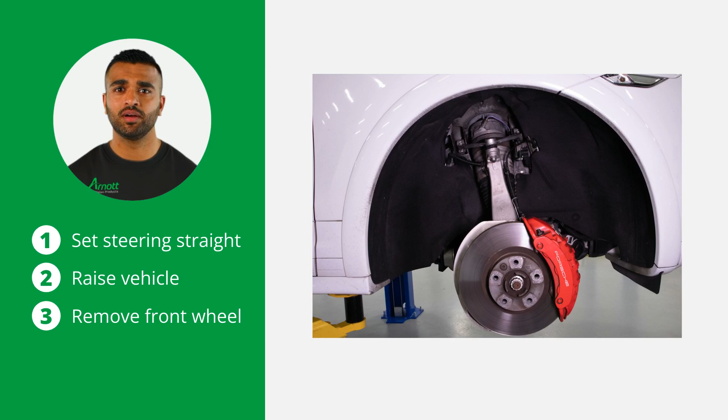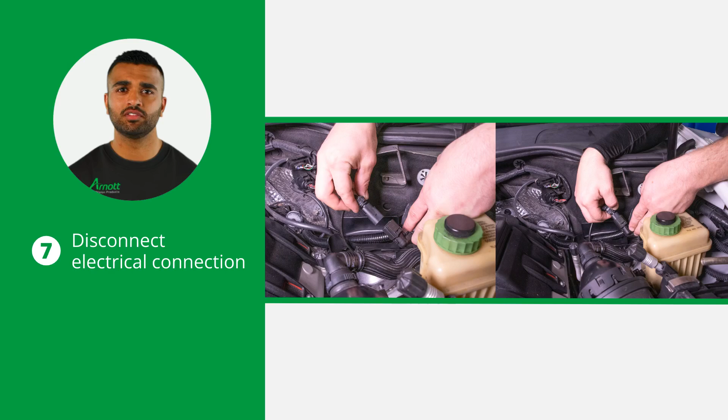Start by setting the steering to straight ahead. Now raise the vehicle and remove the applicable front wheel. Open the hood and remove the applicable engine bay trim to access the strut's top mount and electrical connector. Next, remove the engine strut damper. Now it's time to remove the electrical connection to the strut. When the electrical connection is disconnected, loosen and remove the strut's top mounting nuts.

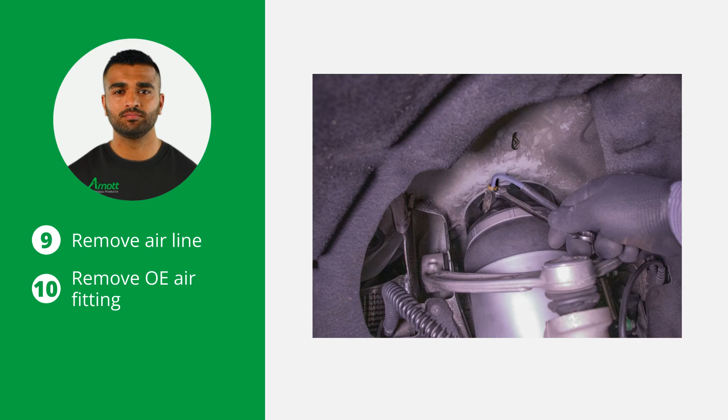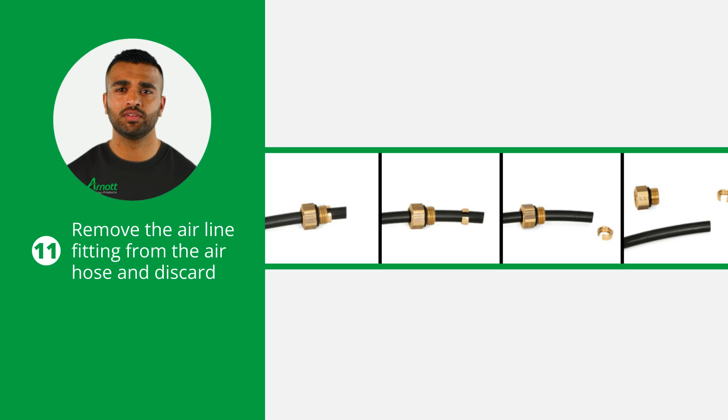The next step is to loosen and remove the airline and then remove and discard the OE air fitting. Prior to inserting the existing airline into the new air strut, remove the old airline fitting from the air hose and discard it. To do this, slide the threaded portion up the line and spread the collet open to remove. Then slide the air fitting off of the airline and discard.

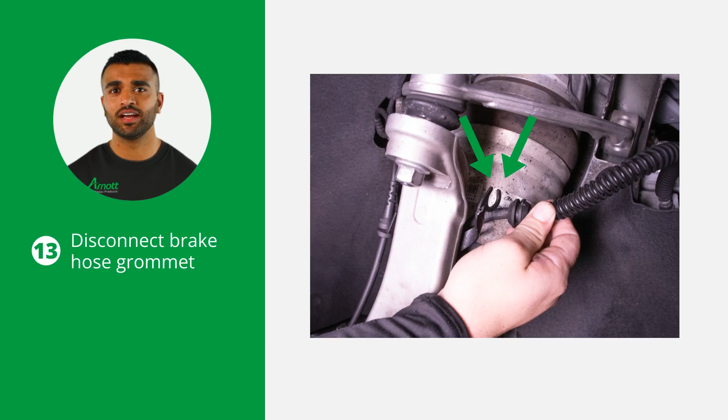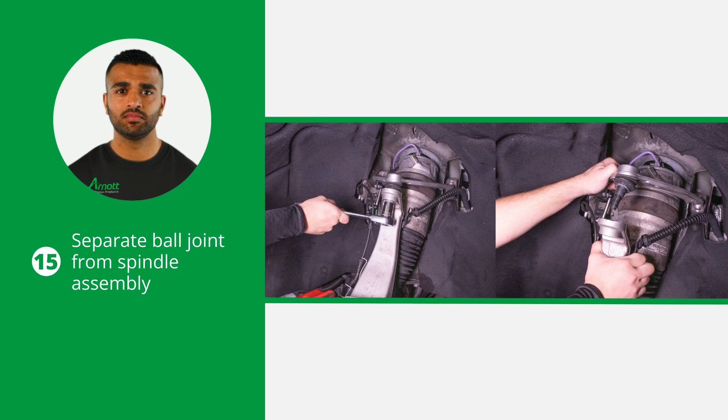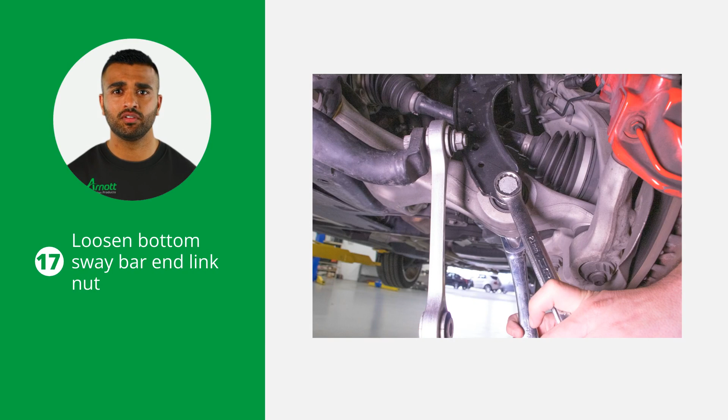Continue by disconnecting the height sensor linkage. Disconnect the brake hose grommet. Now disconnect the ABS sensor grommet and connection. Next, separate the ball joint from the spindle assembly. Loosen and remove the top sway bar end link bolt and nut. Also loosen the bottom sway bar end link nut, but make sure you do not remove it. Finally, loosen and remove the lower strut bolt. You can now remove the strut from the vehicle.

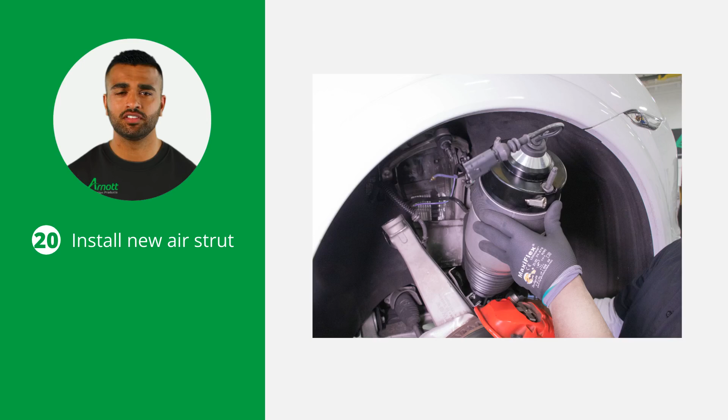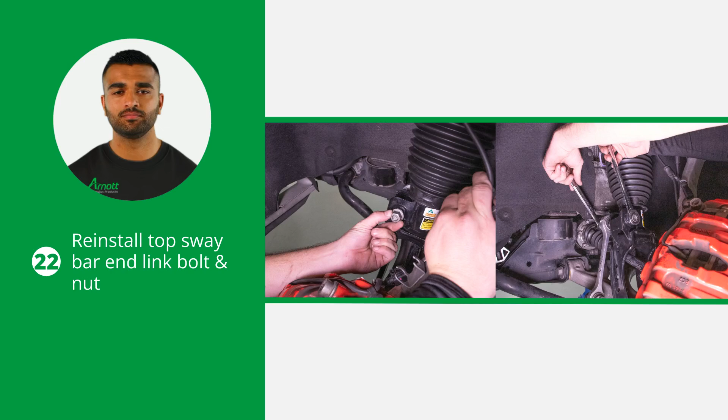Start installing the new Arnott air strut into the vehicle. Ensure you tighten all nuts and bolts to the vehicle manufacturer's specification. Reinstall the lower strut mounting bolt. Reinstall the top sway bar end link bolt and nut. Now tighten the bottom sway bar end link nut. Reinstall the upper ball joint nut.

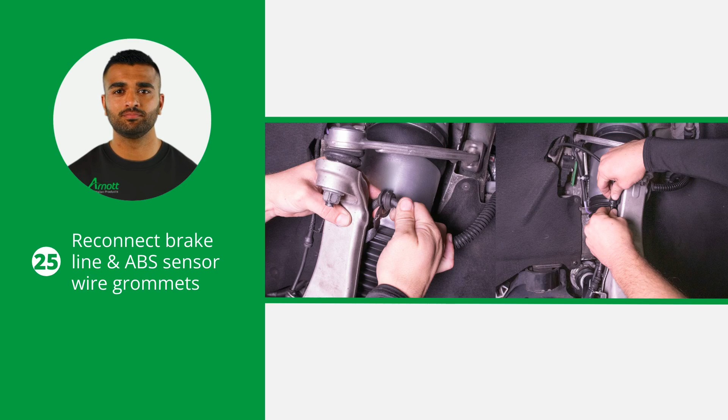Now start reconnecting the sensors. Begin with the brake line and ABS sensor wire grommets. Next, reconnect the ABS sensor wire. Finally, reconnect the height sensor linkage.

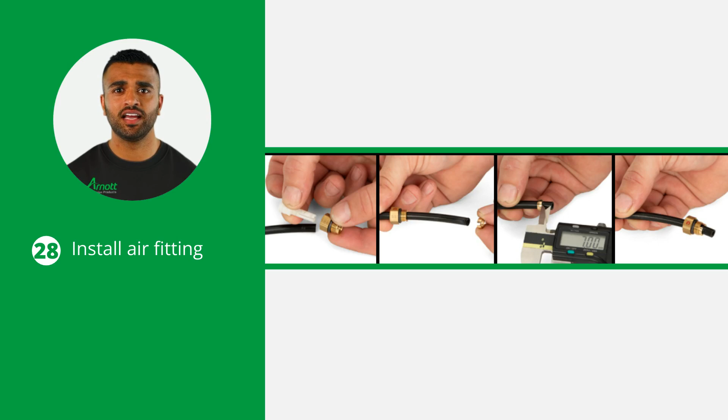Install the Arnott air fitting to the existing air hose by removing and disposing of the shipping pin and inserting the airline through the fitting. The airline should be approximately 6 to 8 millimeters below the collet. Pull the air fitting outward to lock the collet. Now, reinstall the airline.

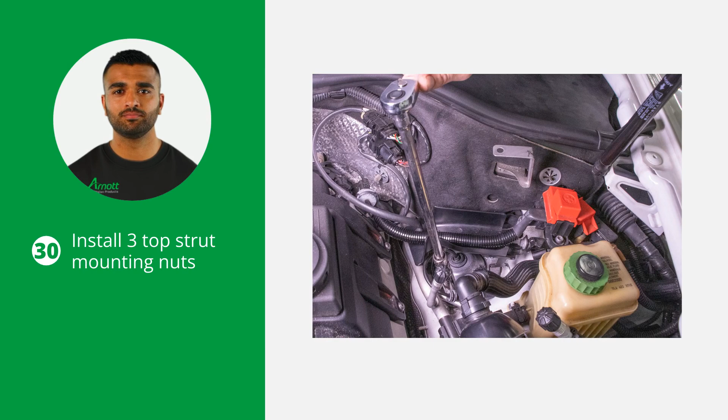Install the 3 supplied top strut mounting nuts and tighten. Reconnect the air strut's electrical connection. Reinstall the engine strut damper. The final steps are reinstalling the side trim cover under the hood and installing the wheel. After this, you can lower the vehicle and the installation is complete.